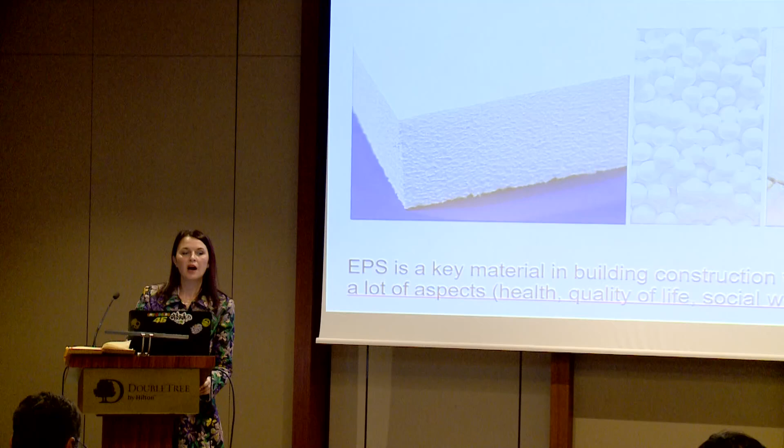EPS is a key material in building construction with an extraordinary impact in aspects such as health, quality of life, social well-being, and energy efficiency. When I say energy efficiency, I mean for building energy performance, because as we all know, if a building is properly insulated, that can save energy for heating and cooling by more than 60%.

EPS has different applications. We all know it can be found in food packaging, in decorative tiles, in road and railway construction, and nowadays even in bike helmets.

Nowadays the application of EPS is more than 7 billion kilograms per year across its different fields of use.

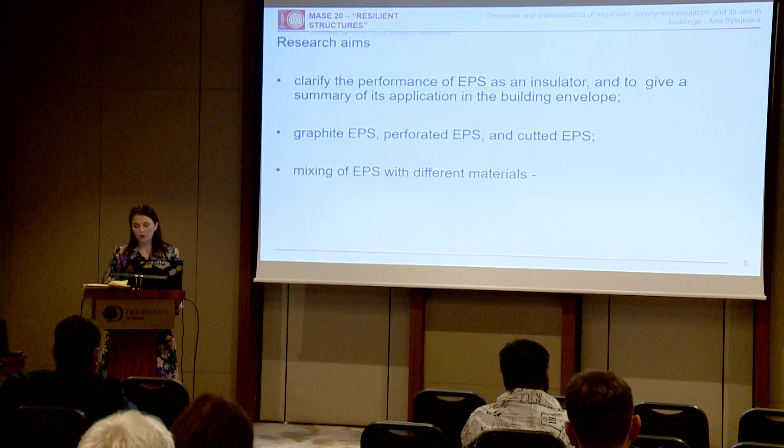The research aim is to clarify the performance of EPS as an insulator, especially its application in the building envelope. We will focus specifically on mixing EPS with different materials, and by the end of the session we will describe graphite, perforated, and cut EPS, which are the best materials from the family of expanded polystyrene insulation.

But first of all, we would like to discuss and explain more about the EPS production process, which goes in 3 stages.

The first stage presents the initial phase, or raw bead materials. Those raw bead materials have the size of sugar beads, and if they undergo the heat of steam, we get pre-puff beads. Those pre-puff beads have a dimension 40 to 55 times higher than the raw material.

Once those pre-puff beads reach the required temperature and pressure, they are put into large boxes which dive into a mold, and then undergo again the pressure and heat of steam. This results in the third stage: panels of EPS, presented in different thicknesses and characteristics for different projects.

EPS insulation is a composite of organic elements such as carbon, hydrogen, and oxygen. Simple EPS contains 98% air, with only the rest of the structure being polystyrene, or plastic, which means this material is very light in weight.

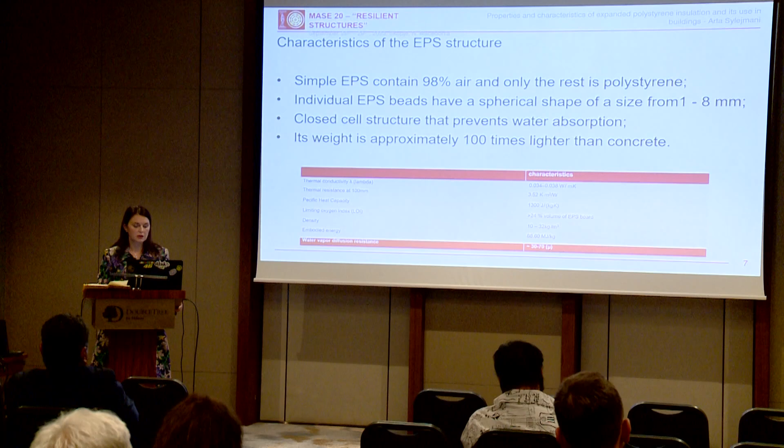Thermal conductivity of EPS is relatively low, ranging from 0.034 to 0.038 watt per meter Kelvin. The density is 10 to 32 kilograms per cubic meter.

In terms of environmental impact, EPS is shown as one of the better materials compared to other thermal insulation materials. For example, comparing global warming potential for the same thickness of thermal insulation, mineral wool has 3 times higher CO2 equivalent emissions than EPS.

These values go up to 4 times higher if the thickness of thermal insulation is 25 centimeters. Of course, mineral wool is less environmentally friendly, also in terms of use of non-renewable primary energy sources.

All of us, we know that organic materials, especially those polystyrene foams, are flammable. The reason is very simple: because they are 98% air. The rest is the plastic.

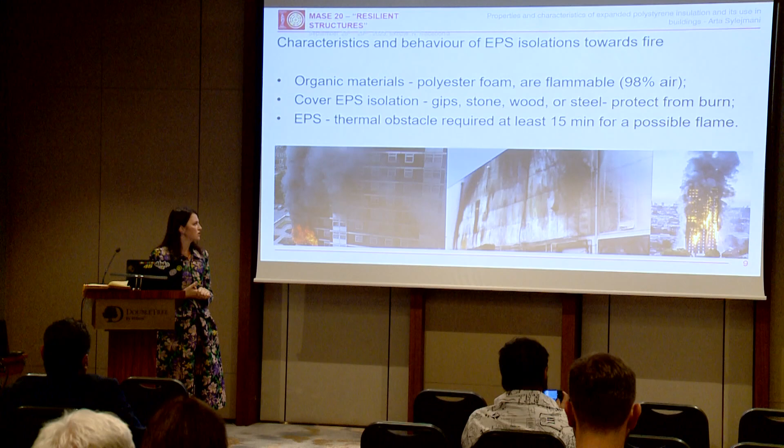Plastic is flammable, so at 100 degrees Celsius the EPS first starts to soften, then it shrinks, and if we heat up the temperature further, we can show that it melts. At that point, when the EPS is melted, it releases flammable gases.

Those flammable gases are hazardous and toxic, which all of us know the impact of on our life. So many researches and experiments have been done in this regard in order to find fire-retardant solutions and also to find the proper mixing of different materials and additives in order to solve the issue of EPS towards the fire process.

Application of EPS in the construction sector. All of us know that it's widely used. The reason is very simple: because it's cheap compared to the other thermal insulation materials. It's efficient, it's standard-based, it's high performance, and also it's environmentally friendly.

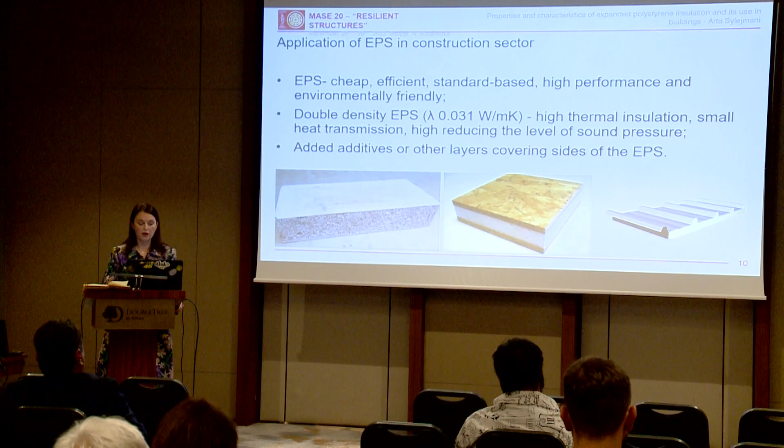EPS can also be found mixed with other materials and additives, but not all the time can EPS be the main material. Sometimes even the waste of EPS can be part of other materials, such as concrete.

If we mix concrete with the waste of EPS, we can get a lightweight EPS concrete, which means we'll reduce the weight of the main material, such as concrete, and also increase the energy performance of this material as a whole.

The combination or mixing of EPS with other materials can also be done with steel, aluminum, fiber, carbon, wooden cellulose, waste, etc.

Also, there is another disadvantage of EPS: when it is exposed to sunlight, it is sensitive, because for every 17 degrees Celsius of temperature difference, EPS can change its length by 1 millimeter per meter, and vice versa. If the weather condition is cold, it can shrink, and we will have these kinds of problems in the application of EPS.

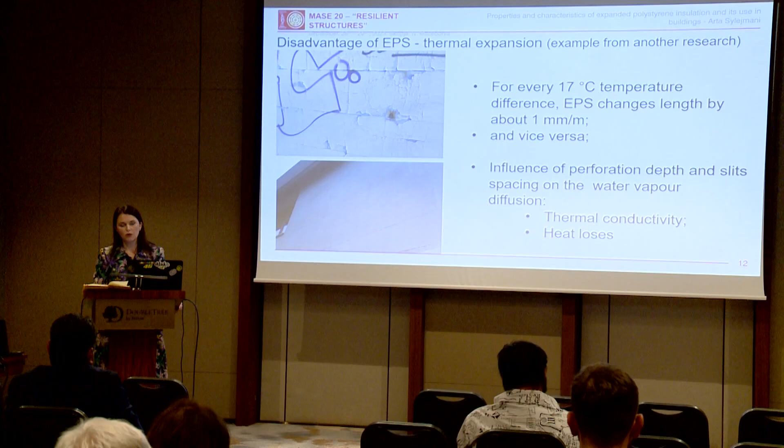But there are also some solutions, for example perforation depth and slits spacing, even though we can have slight deformation such as increasing thermal conductivity and heat losses. But this material can still be safe and applicable most of the time in those kinds of buildings.

And then we come to the graphite, perforated, and cut EPS. As I said in the beginning, I wanted to present these three materials because they are the most suitable or favorable in the family of EPS. The reason is that they are very stable dimensionally; they change less than 2%, even when exposed to high temperature and humidity.

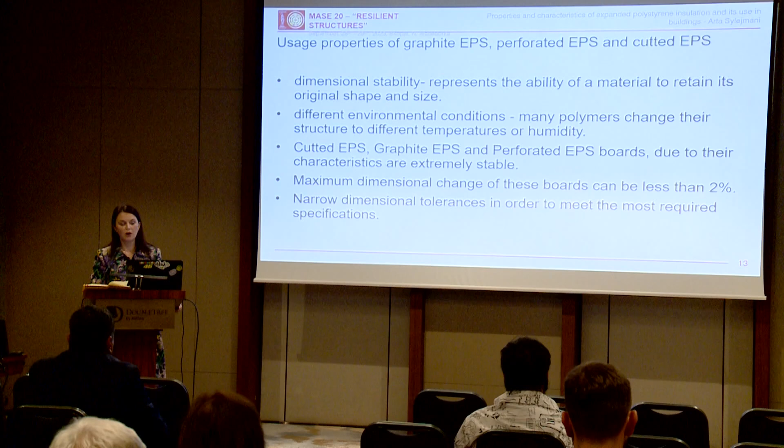Cut EPS has a rigid structure, closed cell foam, no voids, lightweight, and elastic. By using CAD systems and CNC equipment or machinery, we can have different applications of this material, not only in the construction sector but also in aerospace, aircraft, marine, and transportation, and nowadays it's also used in the production of renewable energy sources, especially bioenergy and wind.

Gray expanded polystyrene: you can see that this EPS has a different color from white, a dark color. The reason is simple: because in the beads of the thermal insulation, graphite is integrated. Graphite has a dark color, which is why it has this color.

This presents an insulation with better ability, an improvement of insulation by more than 20%. The reason is simple: because the radiant heat, when it tries to go from inside to outside, reaches the layer of the EPS boards, and then the radiant heat moves through the whole graphite insulation, which reflects it many times, meaning the heat comes back again to the inside. This is why these boards are much more suitable and have high performance.

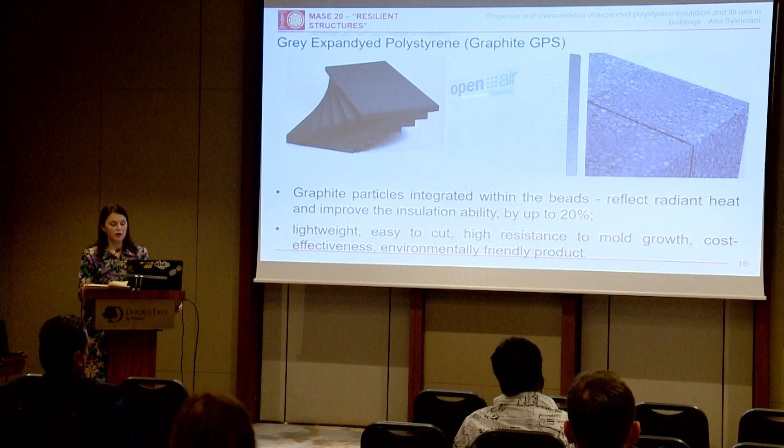Also, those panels are lightweight, easy to cut, highly resistant to mold growth, cost-effective, and environmentally friendly products.

The last material is perforated EPS boards. When designing a building, we have to think about airtightness, which is a crucial consideration. Each building envelope element has to be breathable. When we think about breathable walls, we think about perforated EPS boards, also known as open EPS boards. These have vapor permeability due to their structure - panels with a lot of holes or air pockets on their surface, with a diameter of 2 to 3 millimeters, which helps ensure high vapor permeability and enables water vapor to be released from the surface of the building.

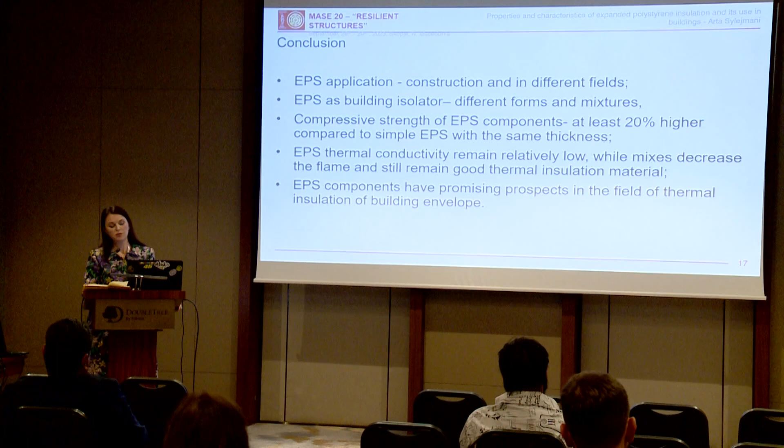As a conclusion, we can see that the application of EPS is worldwide in different fields, especially in construction. When mixed with other materials, we can see that it decreases the flame risk while still remaining a good thermal insulation material, taking into consideration all the good aspects we've explained. We can say that EPS components have a promising prospect in the field of thermal insulation of the building envelope, now and in the future.

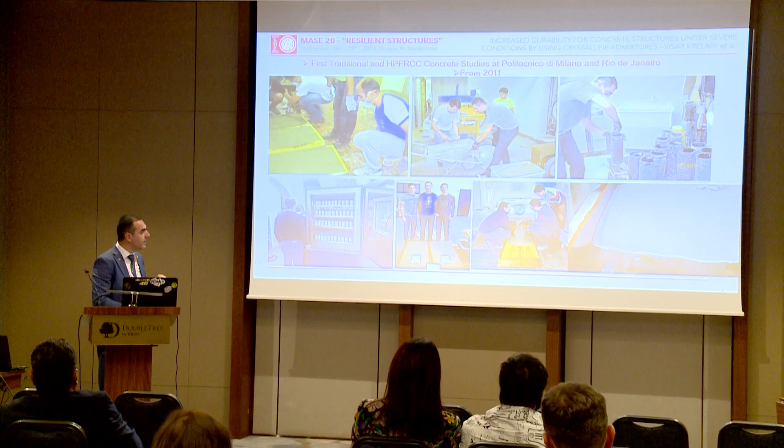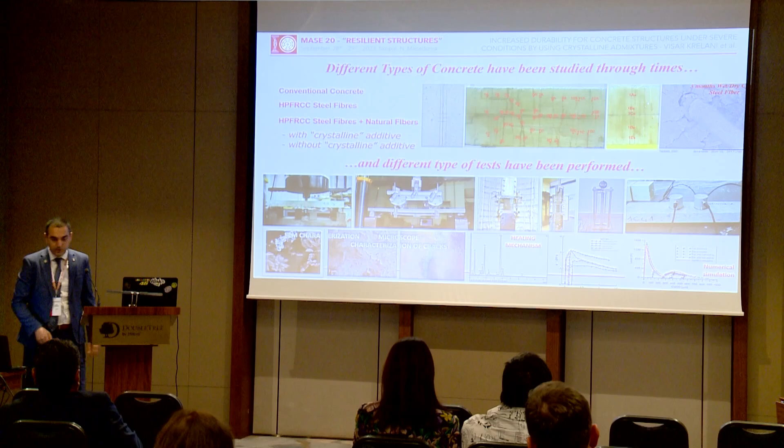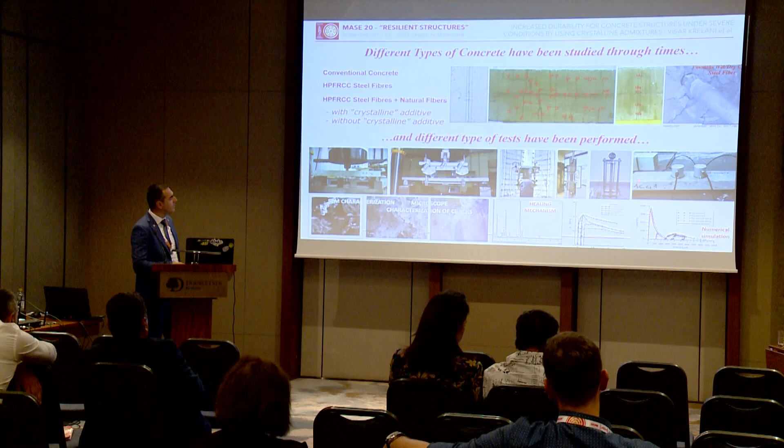As you can see, the types of concrete tested during time range from conventional concrete, high-performance concrete with steel fibers, to high-performance concrete with steel and natural fibers, related to the field of sustainability. We also have different types of tests: for natural fibers, single crack, for high-performance, multiple crack, bonding capacity, then 3-point bending test, 4-point bending test, tension, creep, shrinkage, UPV, SEM characterization, and microscopic study.

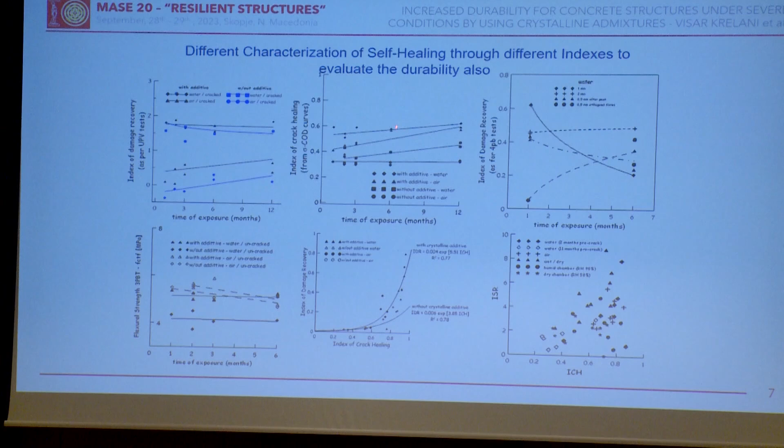Normally you need to complete it with a numerical simulation. To complete all this, you have to evaluate the amount, and for that we need to produce some indexes. Different indexes have been calculated through time for self-healing, to connect it with durability.

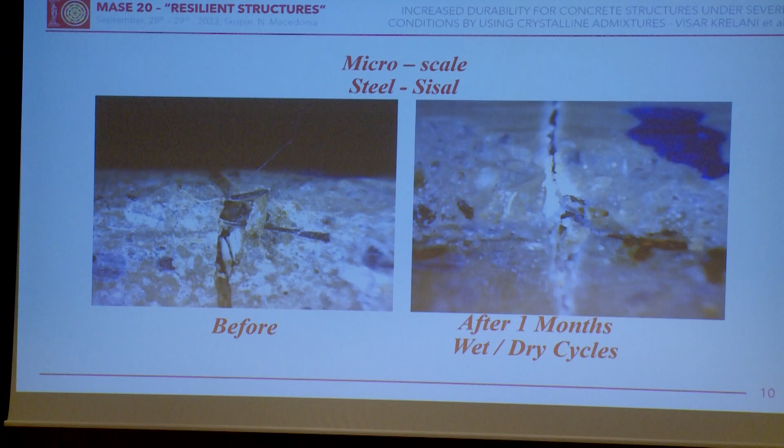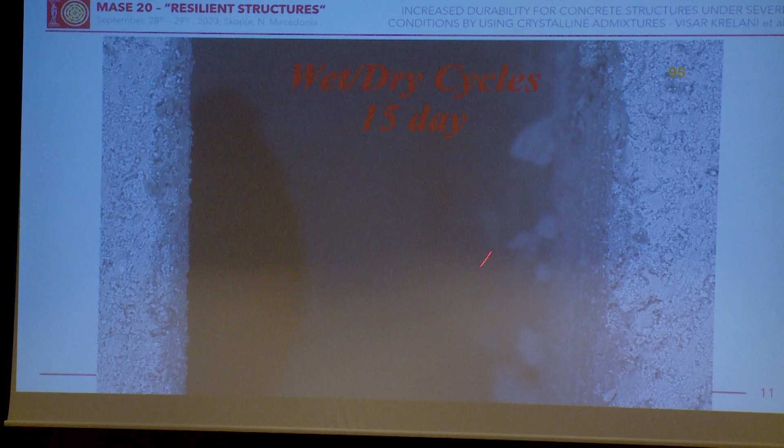Another point was to see if the crack is very big, whether it's possible for these crystalline admixtures to happen. If you do wet and dry cycles, it's a very fast procedure. After 15 days, we can see some of the crystals, and if we continue after 30 days, you can see that the amount of crystals increased.

Having this increase of crystals means a lot, because if we had a smaller crack, these crystals can bridge the crack, which in terms of durability is extremely important. We'll talk more about this topic later.

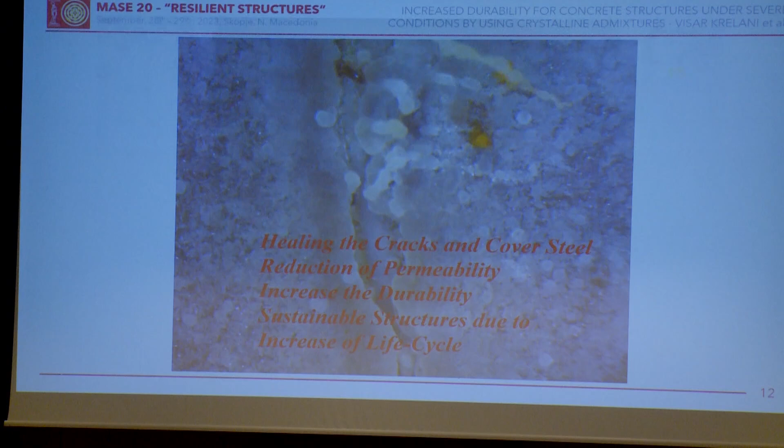This image is interesting - it shows the cover that also covers the bars, so we understand what this means in terms of durability. As we've heard in different discussions these days, healing the crack will cover the steel. This reduction will result in reduced permeability, and reduced permeability will increase the durability.

If we arrive at the point of increasing durability, we are talking about sustainable structures, and having sustainable structures means we'll increase the life cycle of the structures. So this is all related - we can also call it green concrete in this sense if we arrive at this point.

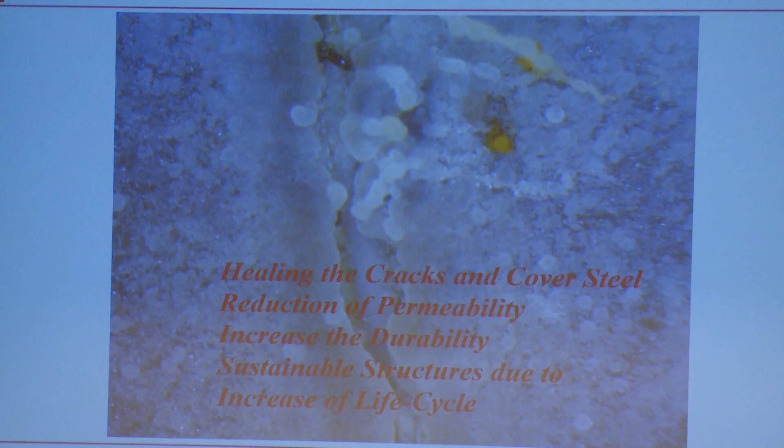Turning, being in Skopje, people always have a bit of dynamic movement, unluckily because of the earthquake.

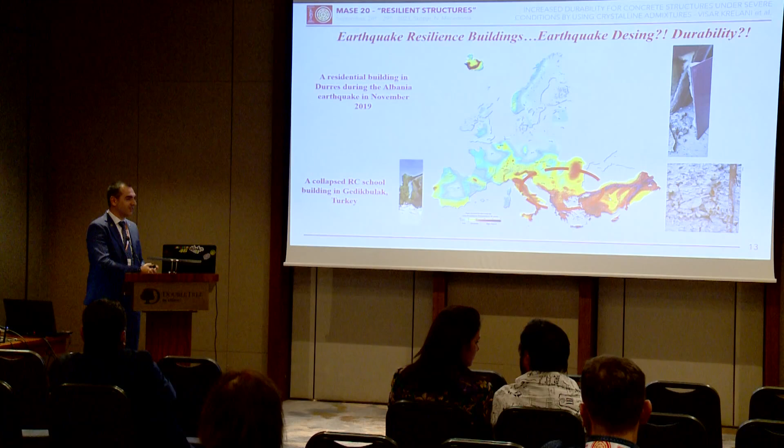If we see the map of the hazard in Europe, we see that the Balkans have a lot in common. One of the most important things is the possibility of earthquakes, so we are all together in this. This is a very interesting thing that makes us the same. Unfortunately we have Macedonia, Kosovo, Albania, also Italy, but we are talking for this area, and the probability that we'll have an earthquake exists, actually.

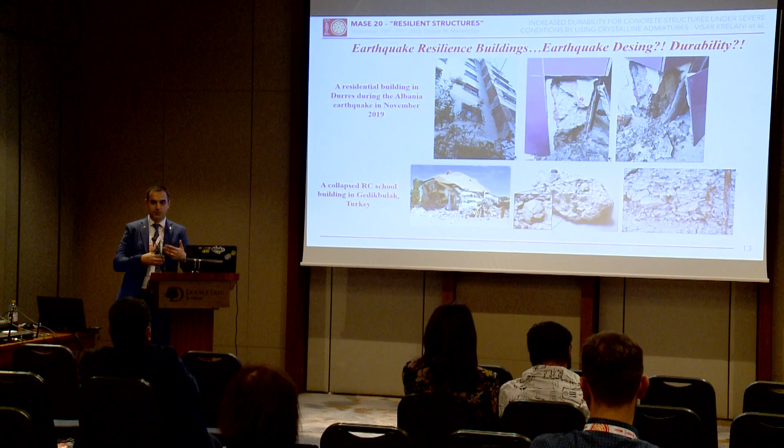But what is durability related with earthquakes? Someone can say, no, nothing. But in fact, we are seeing through the years that it's exactly directly related.

We have two examples. As a faculty, we helped Albania in 2019 in November. Luckily it was the 27th of November and not the 28th, which is the independence day of Albania, when all Balkan people go there for festivities, and we would have had a very high number of losses. It was a day before that happened.

So what we have seen, we needed to evaluate. We were part of the international community to evaluate the buildings. You can see here the building - we're not talking about the permission of construction, etc. The people from the apartments said our building is okay, we will continue to live here. Then we said, let's see what is in these pillars. This is a column, the base column of the same building.

And we took out this plate, and what you see, the concrete just fell out. Unfortunately, if you see the bars, even the bars are in a very bad condition. So this building needs just another push, maybe, and people really... so we needed to put a red X in this building because it still has to be studied if people are allowed to enter.

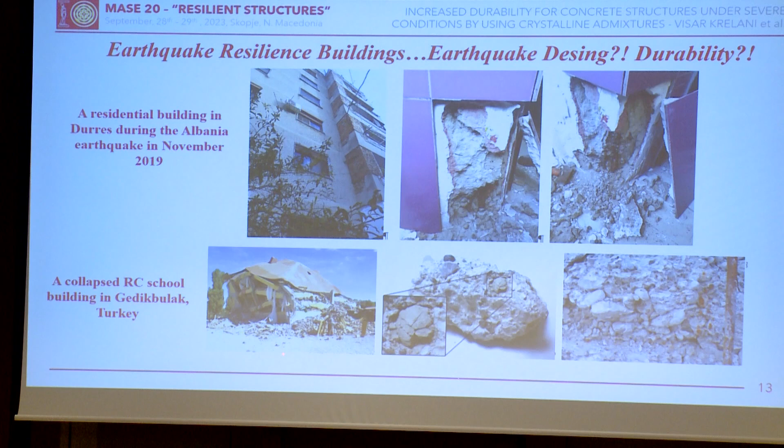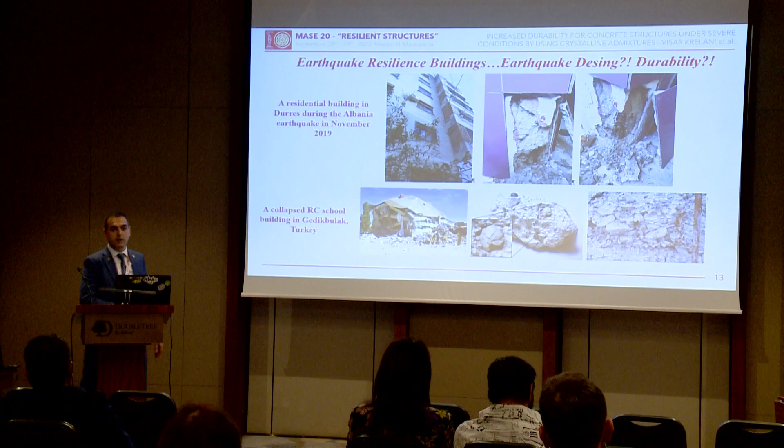This is the worst, and when we talk about schools, it's more sensitive. This school is a Turkey case, and here we see the quality of concrete has been studied. If you see the quality of the concrete, we can see the cement paste is still pure there, not hydrated. But if we see the reinforcement, you can see the condition it is in. So unfortunately, the result is this.

So it is related, earthquake with durability, yes. Even in a statistical study that has been done, we see that the amount of cracking is one of the main factors that affect durability.

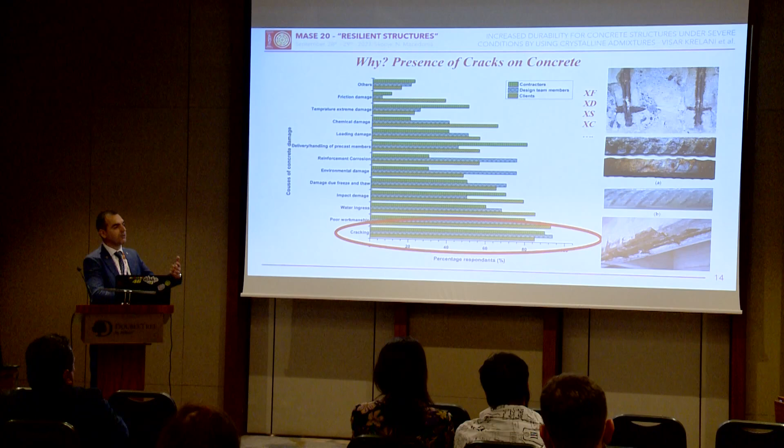Then if we think about the environment, the Balkans have a very severe environment. We have XF, the freeze-thaw cycle condition. We have XD - the municipality puts salt on the street, so the concrete suffers. We have XS, for the seaside. We have XC, actually water in the concrete, and the result is this.

What to do? So our field, we have to find a solution. Van Breugel, an important researcher, gave some studies from statistical data.

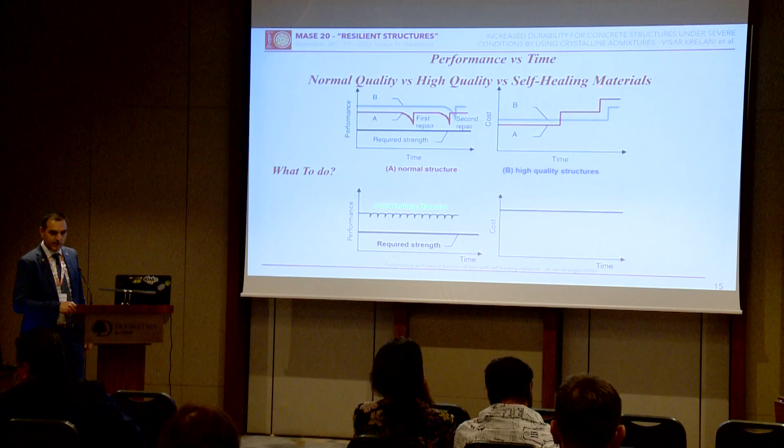Okay, we go use higher quality concrete. The first repair we'll have after 25 years of the structure. In cost, we have higher cost, but normally lower than the normal concrete over time.

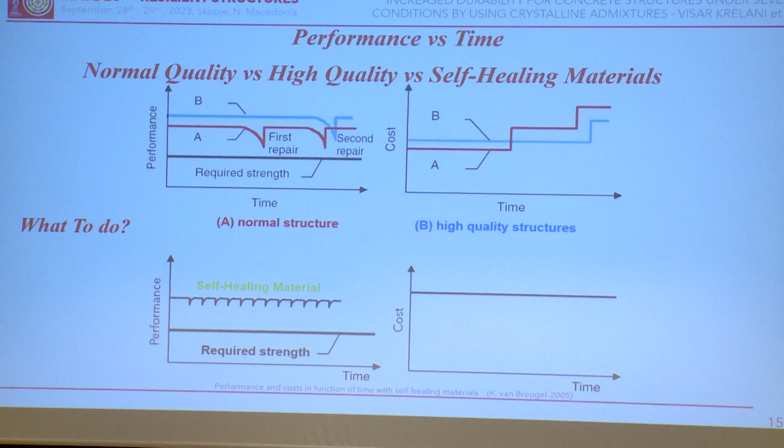Now what to do? We have another type of concrete, which luckily is being studied and starting even to enter the codes - self-healing concrete materials. As we expect, we normally don't discuss required strength always. If we have these cracks and they recover by themselves, we will never have that problem of big cracks and repairs. Normally, if we want this, the cost will be higher than both previous conditions, but over a longer lifespan it will be lower than both types of concrete that we'll use.

Okay, after this introduction, I will enter the case study. Together with the team, Professor Driton, the Penetron team, and also Professor Liberato from Milano, we studied a case on the seaside of Valona, in Albania. I would like all of you to be there, yes, but I'm also mindful of time, I'll try to go faster.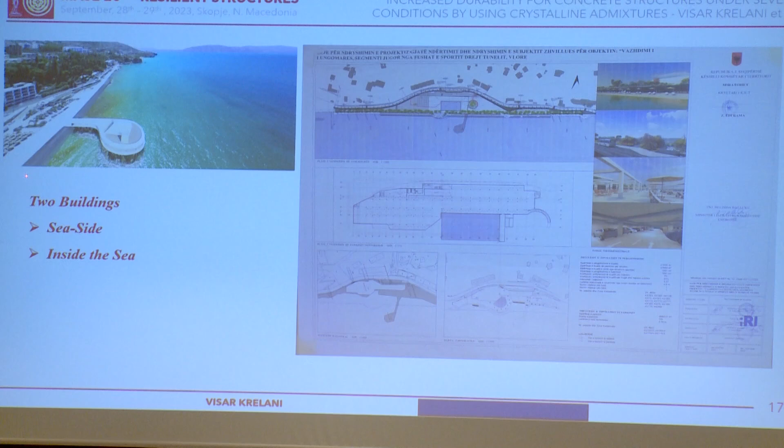So at this time we are studying two types of buildings, one inside the sea and one on the lateral seaside. So we have XS, a hard, severe environment.

We have studied mix design, inducing the crack, parallel laboratory testing, discussion of experimental results, and also the conclusion.

First, mix design. When we plan the concrete, this is the key point. We have a building that will stay constantly inside the sea, and we have a building that will be near the water of the sea. So we have here two types of concrete.

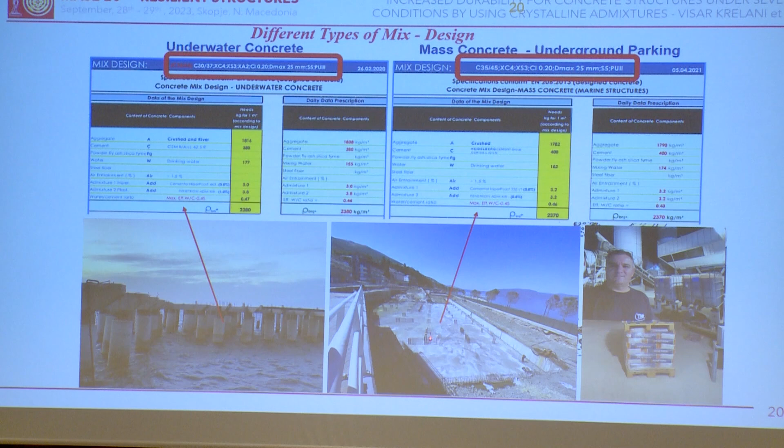C3037, and C3545. This we'll call underwater concrete, lower strength, but important is to see PU3, which we'll explain later. Then for the underground, we will have 3545 and PU2. In both cases, the crystalline admixture has been used, and we'll see the result.

This is a site exactly near the building that has been constructed. We saw the year after, this is the result if you don't take measures into consideration. And then after 2 years, who knows in what condition it is. So we needed to take care.

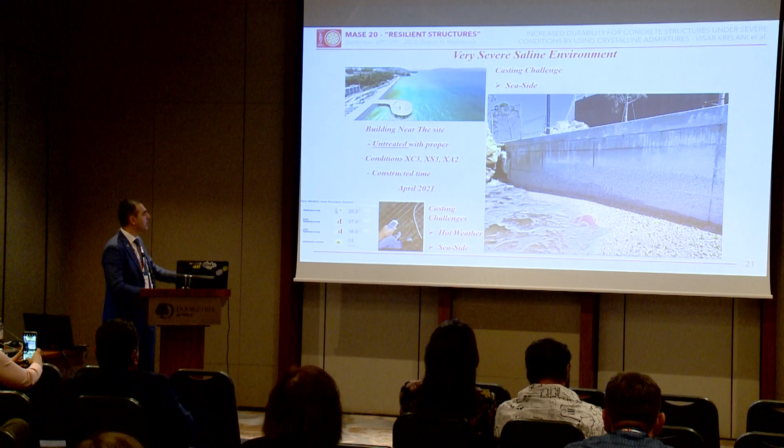Challenges a lot: hot weather, severe environment, etc. Here it's a video just to understand the situation. It's not just severe environment, but during the winter it becomes even dynamic impact. So this is the building ongoing retrofitting or strengthening, and the type of how it has been done also.

Here it's if it works, and I guess it will work - thank you for the technical help. Then this is after 12 hours, the quality of concrete needed to be studied.

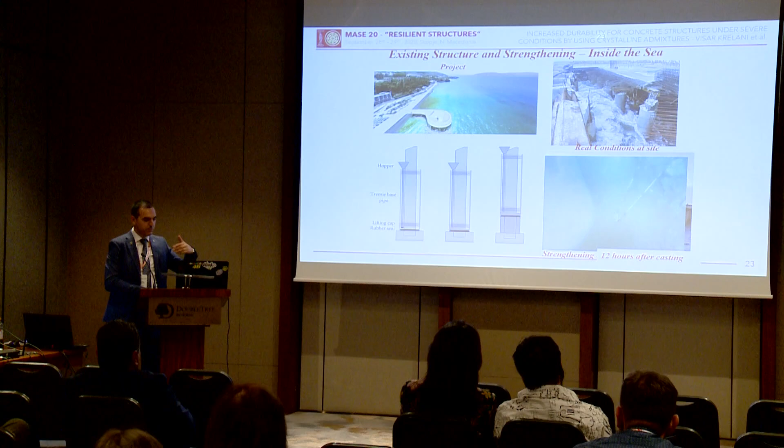Then you can see that at the bottom after 12 hours, the situation - you know, you need specialized people to go and test it. It's okay, 12 hours. So the quality of concrete normally should gain strength very fast.

Then these are conditions due to the casting. So let's start from this - casting during the night. Also, the situation to create this environment is not easy.

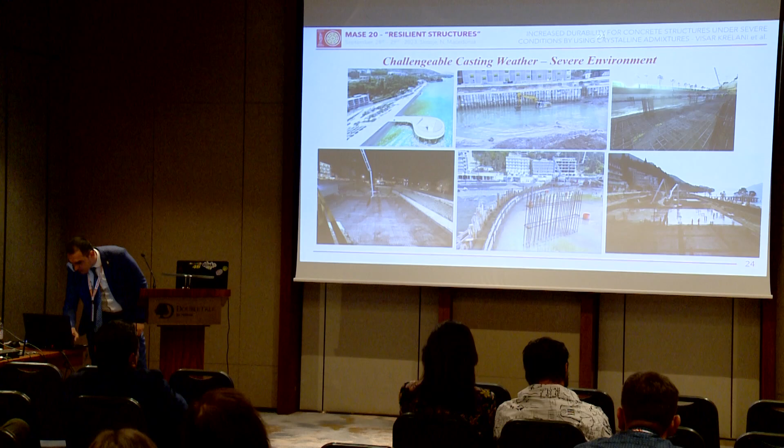This is the plateau of the restaurant, and also this is the finishing if it's working. Just the planning of how it's done - okay, maybe not that one. Never mind. So this is the morning when the casting of the concrete is finishing, and in parallel, just to remind, we were controlling also the quality of the concrete.

An important issue is to induce the crack. Cracks happen, but we want them to happen where we want. So to induce the crack in the walls, a system has been put in the joints.

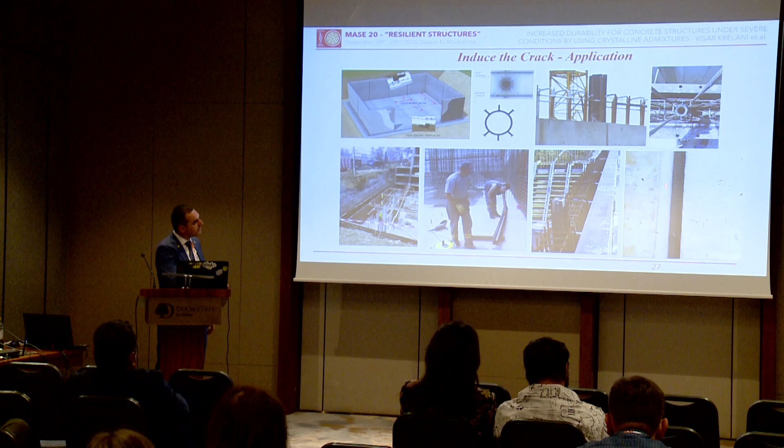I'll not lose too much time detailing this, but this is the result of concentrating the crack. The crack has been concentrated, as we expected - cracks will happen.

And we see that this was an early age crack. After a year, we see something, but if we zoom here, after a year we don't find the crack anymore. What happened? Not always does the plan go how you want.

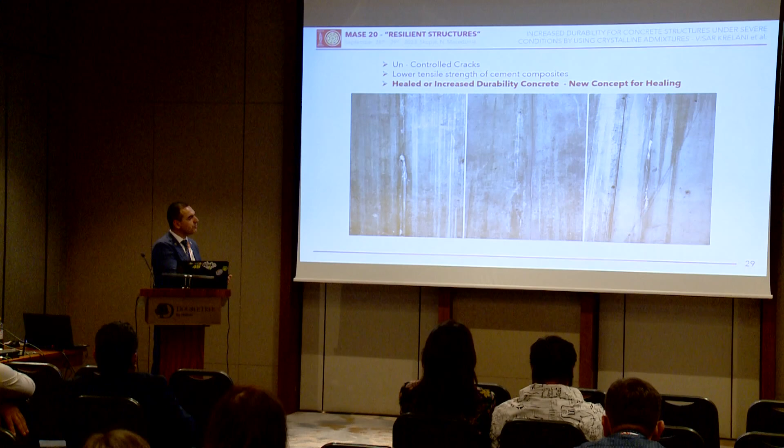And some cracks happened again in some other sites. But we can see here that another help came. So in cracks not induced, we had the product of crystalline admixtures that closed them. What we want to see in different places happened like this.

But the actual condition is that we have a very dry wall - it's not as the wall had been before. So now let's pass to the parallel test of the laboratory.

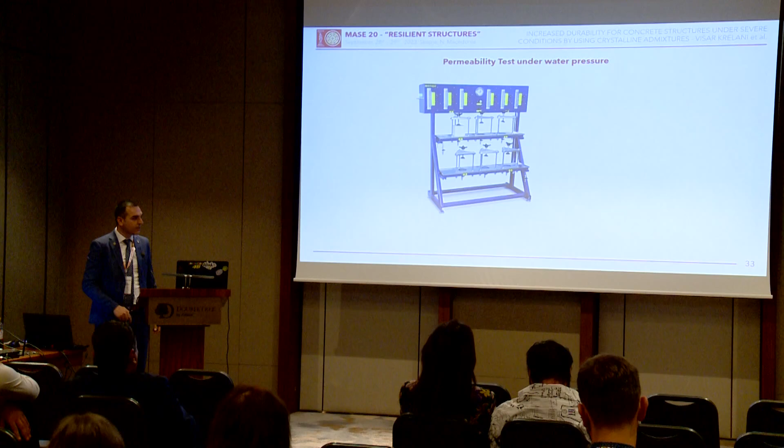Parallel test of the laboratory: as we know, the codes ask you for the permeability test. Permeability test is using this machine, which has been done in parallel with controlling the site. And we can see here that for two types of concrete, the permeability is at these levels: 12, 13, 15.

You know this type of test - to understand the permeability of the water, the European General Code doesn't give a measurement in amount, but the Slovenian one does.

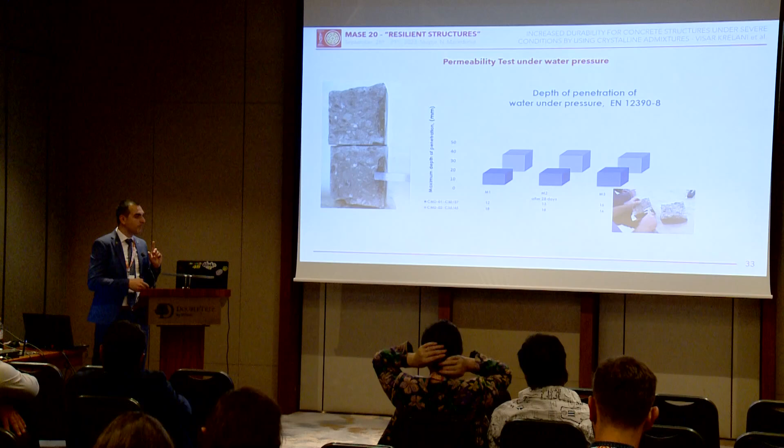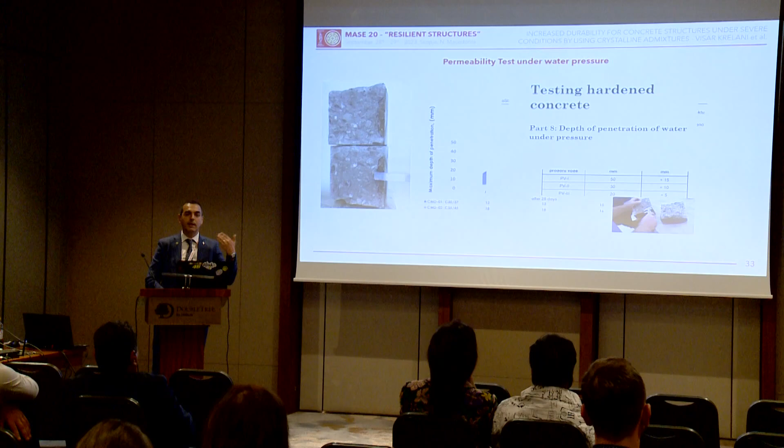And in the Slovenian one, now remember PV3 and PV2. We have PV3 as the lowest permeability amount, so lowest permeability amount says if you have 20 plus 5, so 25, you're okay. In this case, we have 12, 13, 15, which is even 10 millimeters lower. So it's great for the concrete and for the bars.

If we see the underground, we have PV2, 30 plus 10, so 40 is permitted. We have 18, 18, 16. So a measurement with 17, which is good for the structure.

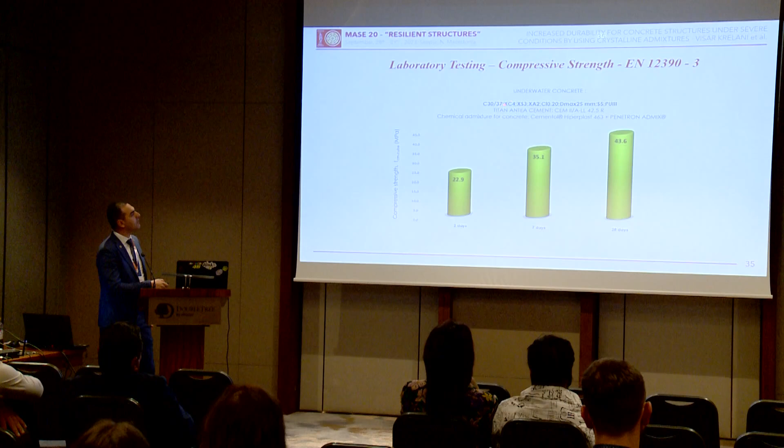Strength is important because it's sensitive in that area. For 30-37, we arrive at 43, so we are calm. For the higher strength concrete, 35-45, it has arrived until 51, so again after 28 days it's okay.

Charts - this is just to show that it's a big amount of tests that has been done during the time. It's not just one.

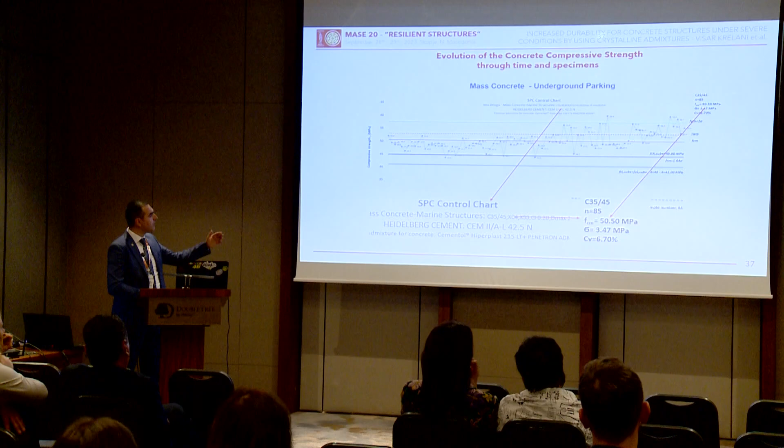So we have the chart of the results, all completed. When you do a permeability test, you also do a splitting test. The splitting test measures the probability of having cracks again, because of the low tensile strength in concrete. But as we expected, the crystalline admixture improved even the tensile, not just the compression capacity. From 30-37, we have 3.7 megapascal tensile testing. From 35-45, 4.2 megapascal tensile capacity, so it's good.

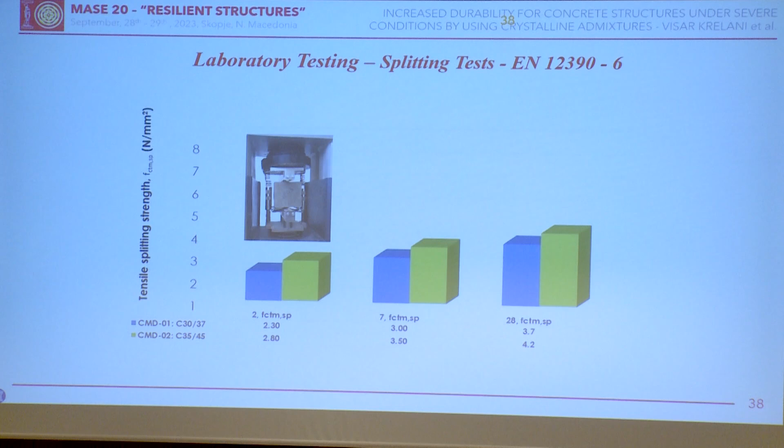How is the actual timing, I've done faster than I thought. Until now I'm at 15 minutes. If we are on the same time, in 2 minutes I'll finish. Spend your time, I can finish in 1 minute. Go to conclusion. Yes, I'll go. So the actual situation is this. Okay, I'll pass this, but this is the situation.

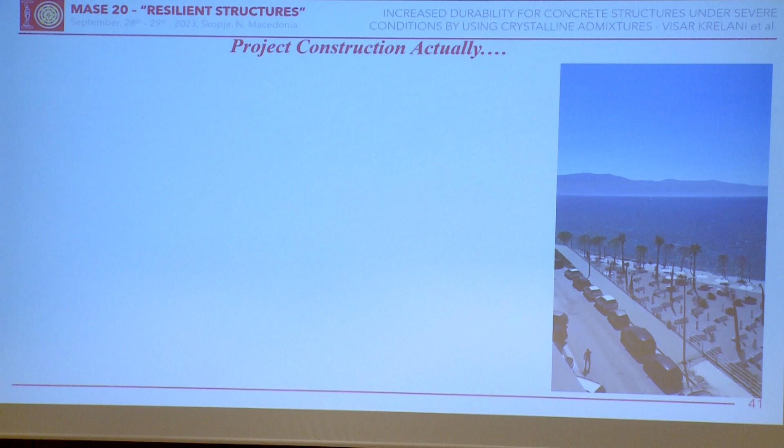The building is finished, and also you have a swimming pool in the middle, around the parking. So it's a very complicated case, but people also enjoy it by the seaside. And the conclusions:

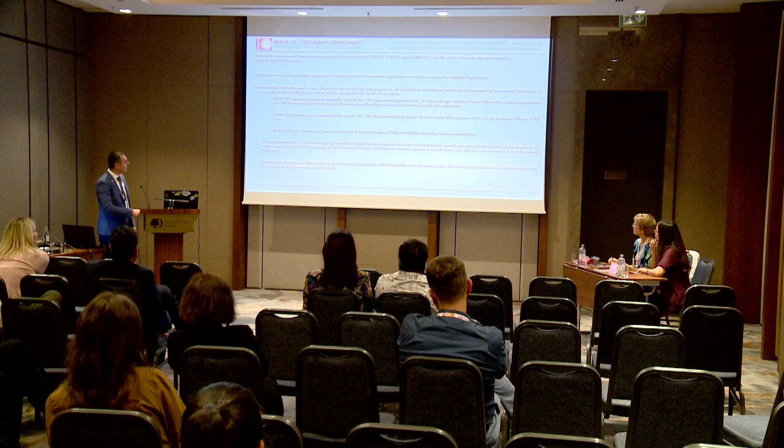Strength has been completed in both cases, which is important for structures. Permeability, we saw we are lower than the requests, exactly in 2 types of concretes. We have longer cycles ongoing, so until 1 month we'll test for permeability. We have created a tailored durability self-healing methodology, which can be used by everyone, including other researchers.

This means that healing the cracks, covering the steel, will create a reduction of permeability, increasing durability, sustainable construction, and increased life cycle. Just to show, these are from yesterday's test, no one has seen them. It's permeability of cracked concrete. This is the result after 1 month in sweet water, for the lake case. We have the crystalline going out, and this is the result.

What we expected with saline water was to not have recovery. Believe me, even a negative result is good, because it's telling us something. We have some new products that we still have to study. It's closing, it's strong, and for durability, again, it's good.

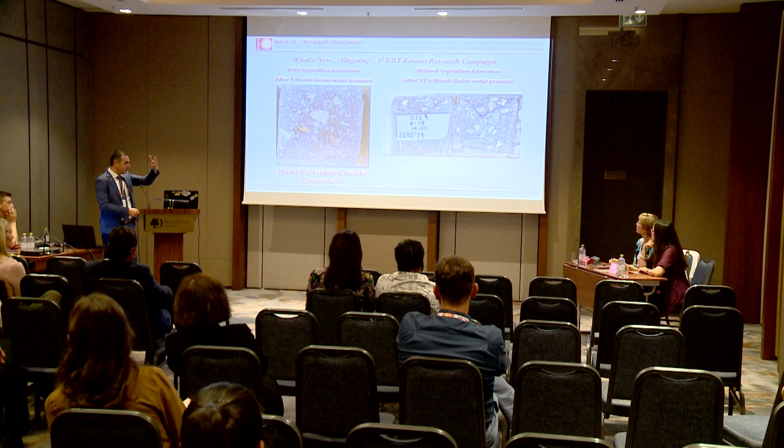Permeability is very strange, we need other researchers to explain it. It's a kind of insulation - after 1 month, water remains inside, unlike what happened in other cases. So we have to study this further, but importantly, it's dry. It's very dry, the result.

And with this, I conclude, and I thank also Penetron for the support, and all of you for having the patience to listen until the end. Thank you very much.

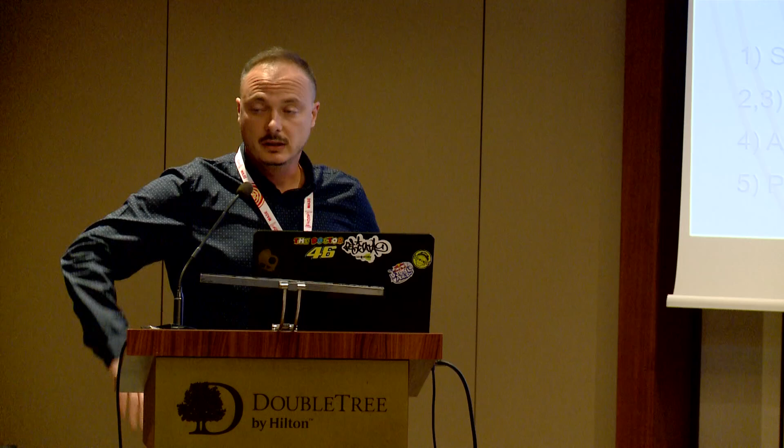Today we are going to see some results regarding this solidified wastewater treated sludge and the effects of using it in some interesting applications. You see the team of authors; this research was developed at the laboratory of the Faculty of Civil Engineering, Belgrade.

The first thing we wanted to present is the fact that there are a lot of floods going on, and we see that very often in the news. These are only some pictures of situations that have happened in Belgrade and Serbia, and this is due to several reasons, one of which is the fact that we have pavement that is not absorbing this water.

As I have said, this is one of the effects studied at the faculty in the area of the broader project, which is given here.

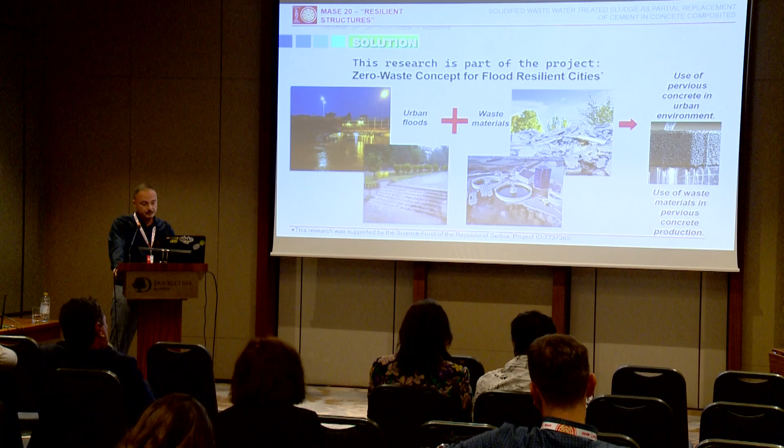Not to make too much talk about the specific details, I want to point you to this use of pervious concrete in urban environments as a potential result. The project is illustrated here, something done at several faculties, not only in Belgrade, and is funded by the Fund for Science of the Republic of Serbia, program IDEA.

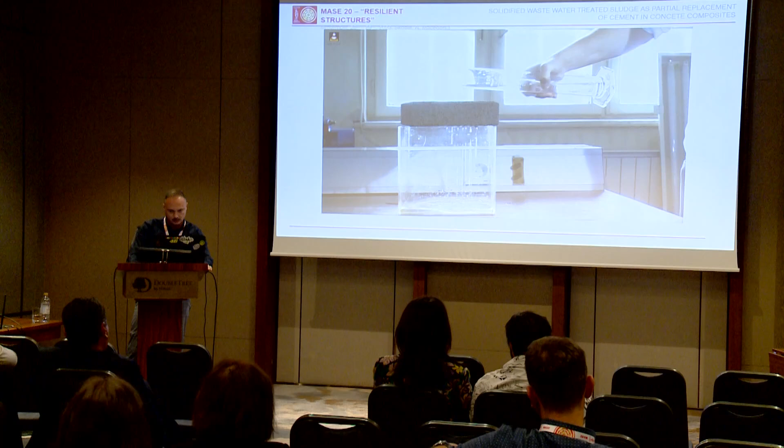Here we have a visual demonstration of such material. So we should see now the... yes, because this wasn't working as I expected.

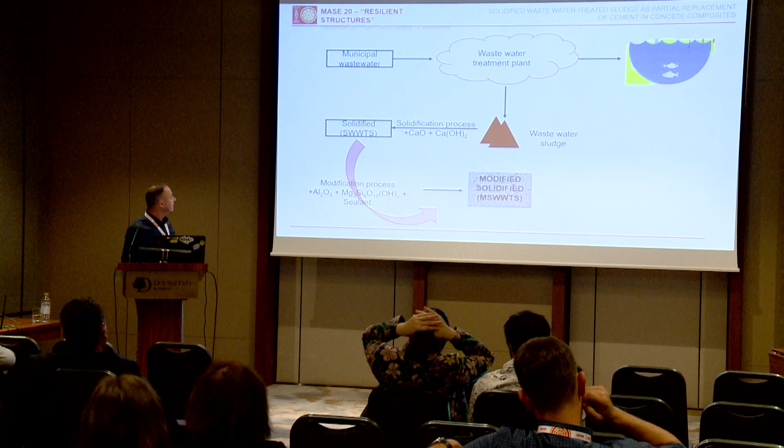So you have municipal wastewater that is treated, and you get wastewater sludge that is waste you have to dispose of somewhere. Because of that, we did solidification and tried to use it.

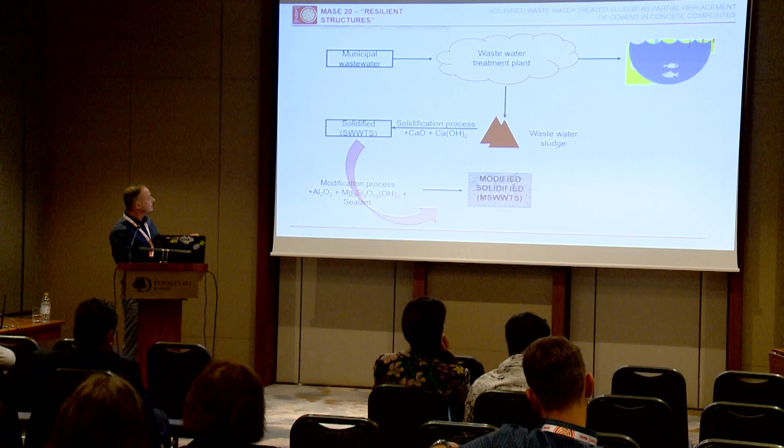We used two types of this material: one is solidified sludge as is, and the other is modified sludge, modified by these agents.

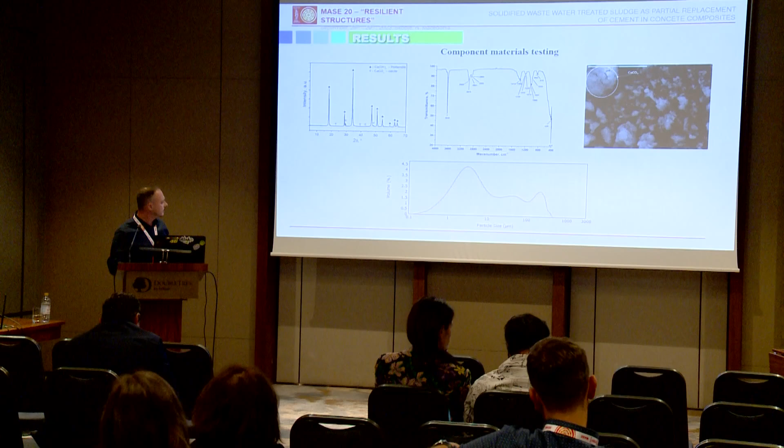This is the material characterization that gives you information about what it is consisted of, and where you can find it in the composites we made. This is the broad particle size distribution that can be seen here.

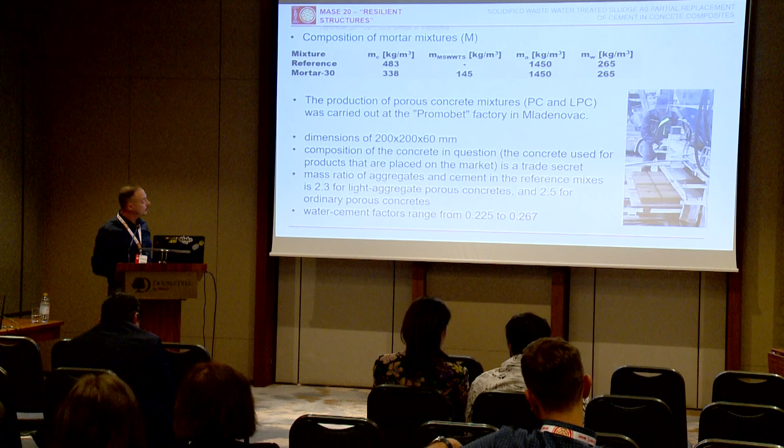This material was used in mortar mixtures, and then porous concrete mixtures and lightweight porous concrete mixtures. Sadly, we didn't have the opportunity to give you the exact composition of the porous concrete and lightweight porous concrete mixtures because they are still being developed at the Promobet factory. But this is what we could give you as the main points about the material.

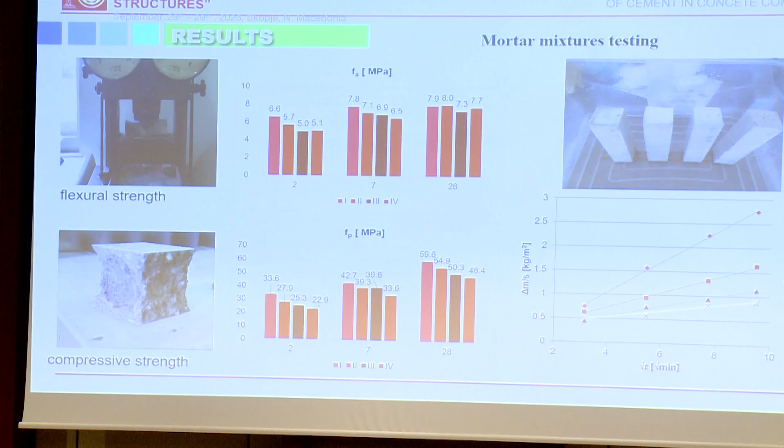I was thinking about giving these mechanical properties results done on mortars that you can't find in the paper, but were presented elsewhere, just to illustrate the trend of decrease in properties due to the amount of incorporation of this material. Therefore, we can conclude that this material usually decreases the mechanical properties, so we thought about how we could improve them.

Both on mortars and on porous pavements, both porous concrete pavements were tested, but the aggregates were different. We had crushed aggregate in one case and porous lightweight aggregate in the other.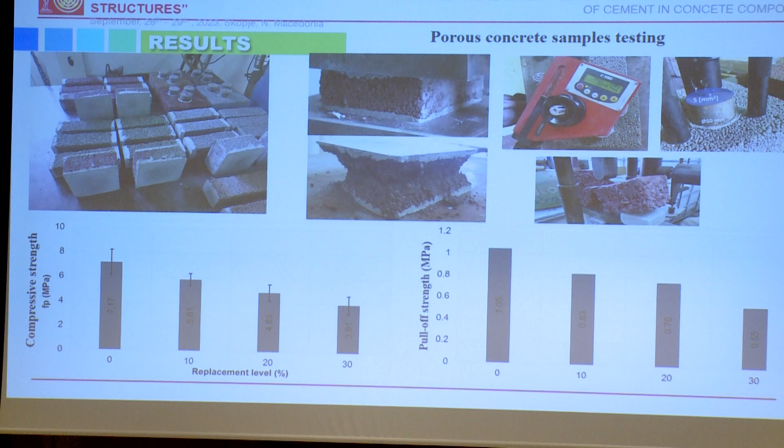These are the results presented in the paper, which give you the main idea of the investigations we have done in those three cases: porous concrete, lightweight porous concrete, and mortar. The trends are very similar to what we have seen on the slide before.

One of the most interesting things is that not only having this porous pavement, porous concrete, was the idea, but also the filtration coefficient had to be finally set, because there was a problem if water was going through this concrete too fast. It had to be set to such a value that the water stays for a while in the porous concrete.

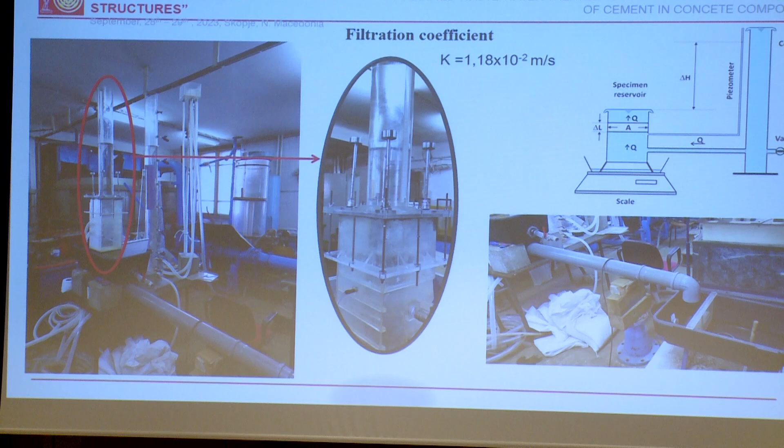At that point we have the positive effect of cleaning the wastewater. That is also one of the outcomes of this research that we expected.

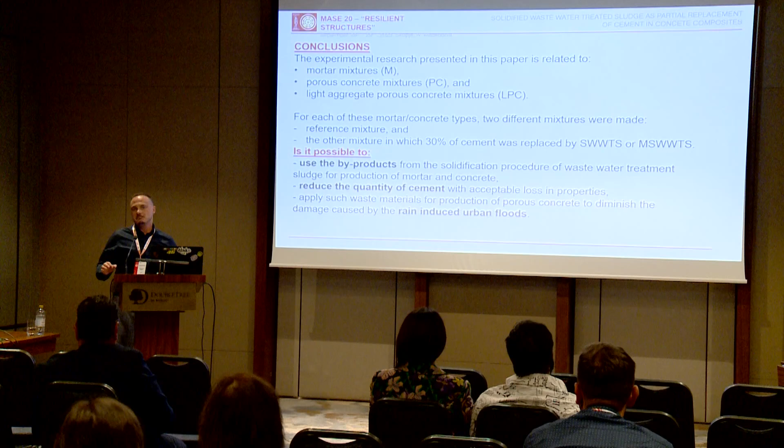Now, two conclusions. What is the fact we all saw? That these products do have a negative effect in composites such as mortars and concretes, but they are possible to use in them, and there is a possibility that we are developing more research to use it in rain-induced urban floods and improve that.

Mathematically, when we calculate the trends, we have this effect on compressive strength: 19% for mortar drop in properties, 24% for porous concrete, and 46% for lightweight porous concrete, and also a decrease in abrasion resistance that was tested only on porous concrete materials.

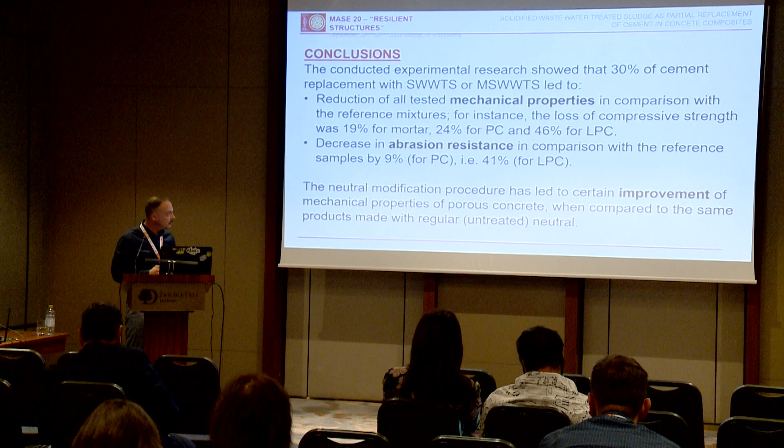The modification of this solidified sludge was in fact a good idea to do, because it made these materials better, and first results say that the improvement is almost twice. The behavior is almost twice better in mechanical properties than when we use only the normal solidified wastewater sludge.

So that was all that I wanted to present today. Thank you.